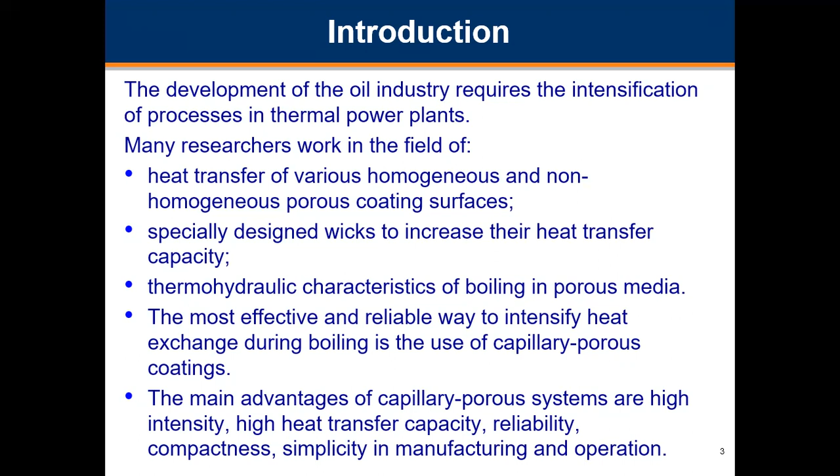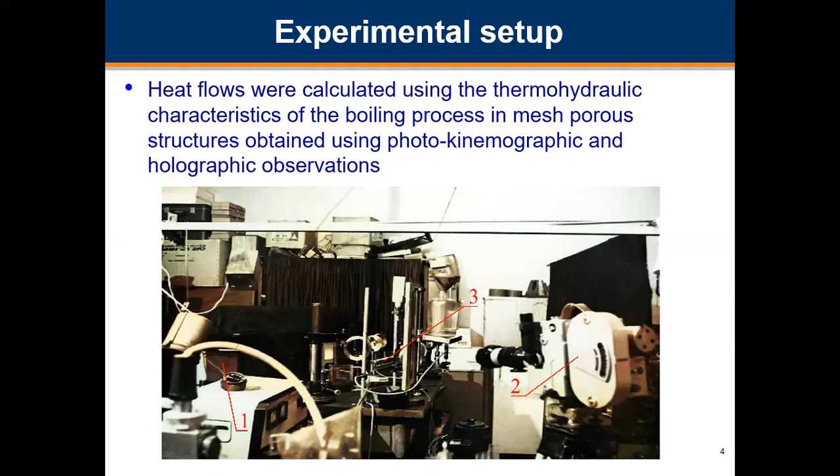Heat flows were calculated using the thermohydraulic characteristics of the boiling process in mesh porous structures obtained using photo-kinemographic and holographic observation. In figure 1, 1 is the laser, 2 is the cine photocamera SKS-1M, and 3 is the porous cooling element. In figure 2, the operation scheme of the porous cooling system, the technique of the measurement of heating surface temperature and liquid consumption and steam are shown.

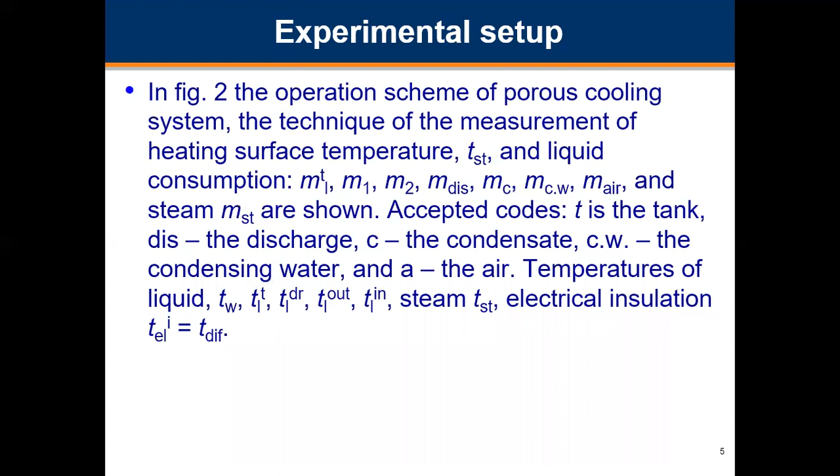Accepted codes: T is the tank, D the discharge, C the condensate, CW the condensing water, and A the air. The supply of electrical energy to the main heater is carried out by a TSD-type welding transformer, the output voltage of which has the following fixed values: 2.5, 5, 7.5 and 10 volts.

The electric current powering the heater is measured according to the scheme with a UCT 6M2 type 0.2 universal transformer. The secondary current is up to 5 amperes. The primary current is 100 to 2000 amperes. The heater voltage drop is measured by a D523 class 0.5 voltmeter. Electric energy is supplied to the guarding heater by a VR-type voltage regulator.

The TSD-type current transformer with 71 volts no-load output voltage is used in studies of the start of liquid boiling and critical loads. The current strength is regulated within the limits of 200 to 1200 amperes. The measurements of liquid and environment temperatures are made using TL4 mercury thermometers with 0 to 50 Celsius and 50 to 100 Celsius scale and a division value of 0.1 Celsius.

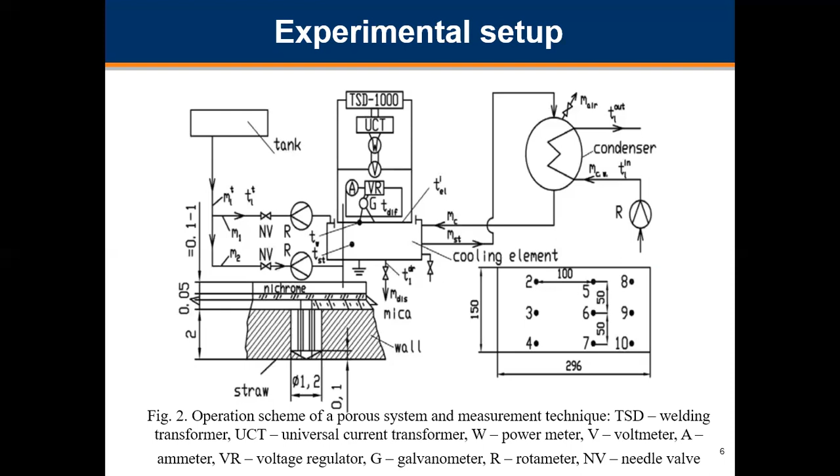The measurements and the technique for processing of experimental data are published in the works. As follows from photocinematic and holographic observations, the dynamics of the vapor phase in cells of capillary porous structure after spontaneous nucleation of a bubble of critical size proceeds with the participation of the evaporating microlayer of liquid under the vapor bubble.

Under certain conditions, the displacement of the liquid film in the center of the bubble starts, followed by the development of a dry spot. Bubble detachment or collapse occurs at diameters several times smaller than at boiling in a large volume, and the value of the detachment radius is calculated by the equation. After bubble detachment, also called destruction, relatively cold portions of liquid are actively sucked up under the action of gravitational and capillary forces.

After some silence of the generation center, a new bubble of critical size spontaneously emerges, with growth time controlled by the coolant flow rate and degree of its underheating, decreasing and occurs with more intense heat supply from the thin, superheated liquid layer surrounding the bubble from the side of the porous structure volume.

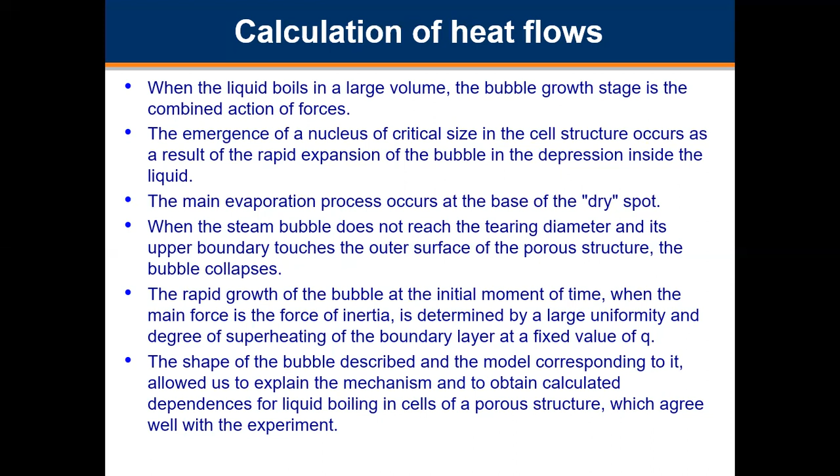During one cycle of bubble development, the temperature of the wall below will change significantly at the stages of microfilm evaporating and cold liquid heating, which explains the high intensity of heat transfer. Reduction of heat flow, value Q, at high parameters of excess fluid would return the system to its previous state.

Surface boiling area, where Ja is the Jakob number. K is the coefficient taking into account the heat storage capacity of the wall. Equation 1 is useful for calculating cooling systems for steam turbines and gas turbines in power plants. B is the area of developed bubble boiling, equation 2. C is the evaporation crisis, equation 3.

The analysis performed of the vapor bubble growth model shows that the presence of vapor on the wall should lead to an increase in the wall temperature under the growing bubble and impair its performance, but the steadily existing microlayer of liquid controlled by the gravitational and capillary forces allows to withdraw several times more heat flow under a single bubble compared to the average integral value, which generally reduces the wall temperature during bubble growth.

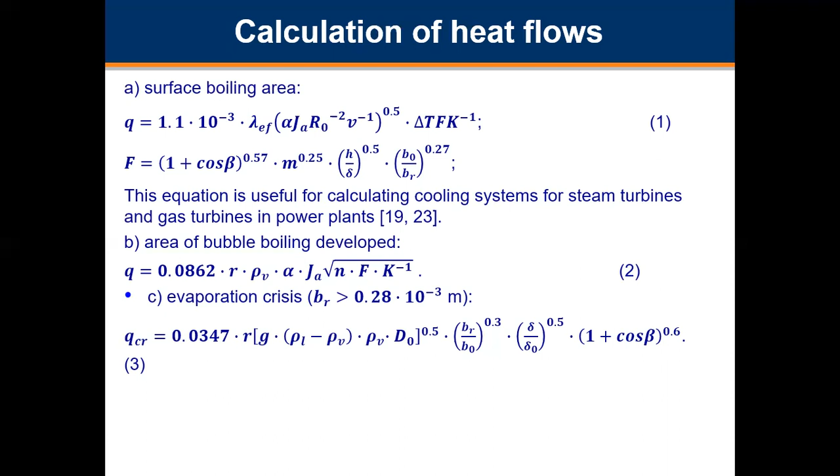Thus, experimental data on thermohydraulic characteristics of the boiling process in mesh porous structures, which can be controlled by the combined action of gravitational and capillary forces, are summarized. Calculated dependencies of the heat flow, equations 1 to 3, on temperature pressure, liquid excess pressure, thermophysical properties of the wall, orientation, geometric characteristics of porous structures, and heat exchange wall are obtained. These equations allow for calculations in the design of thermal power plants.

To analyze the data and determine the limits of application of the porous cooling systems considered, taking into account the different designs of capillary porous materials, two types of evaluation criteria have been adopted: the dimensionless number St, and the dimensionless temperature, equal to the ratio of the temperature in the nozzle trough to the temperature at the saturation line at a given pressure of the working fluid.

In order to conduct a comparative analysis for the combined porous system, we introduced the dimensionless criterion, the ratio of cell width of porous materials, the ratio of the cell width of the near-wall layer to the cell width of the subsequent layer. Area of low values of the dimensionless temperature.

At liquid side wall temperatures less than the coolant temperature at the saturation line, the coolant phase transition from liquid to gaseous state with heat absorption does not occur. Decreasing the temperature to these values is unacceptable, and when the dimensionless temperature reaches the value of 1, with prerequisites for a subsequent decrease in the wall temperature, a boiling crisis occurs.

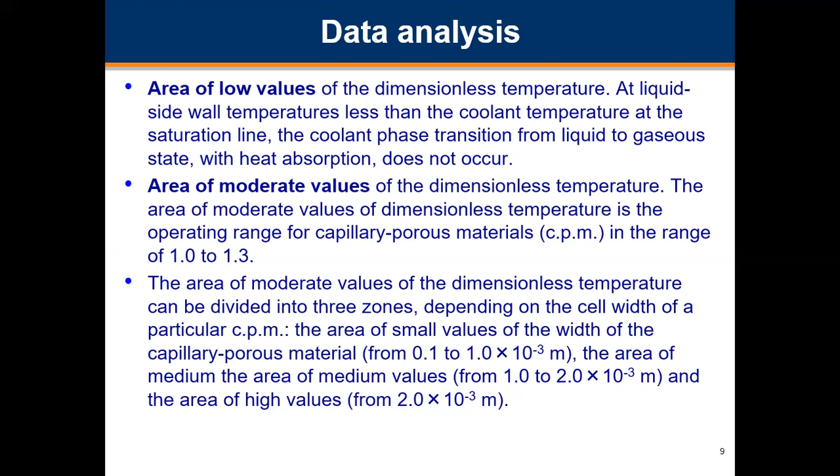The area of moderate values of the dimensionless temperature can be divided into 3 zones, depending on the cell width of a particular capillary porous material: the area of small values of the width, the area of medium values, and the area of high values. The increase in the wall temperature, an increase not calculated due to system imbalance, of 1% leads to a deterioration of the heat transfer process and reduces the heat transfer coefficient by 1%.

For a traditional flow-through cooling system, the allowable temperature fluctuations are no more than 10 K, with all heat flow accumulated by the wall, which leads to temperature overstress in the material of the apparatus. Any increase in temperature requires an increase in coolant flow and, as a consequence, a reliable automation system.

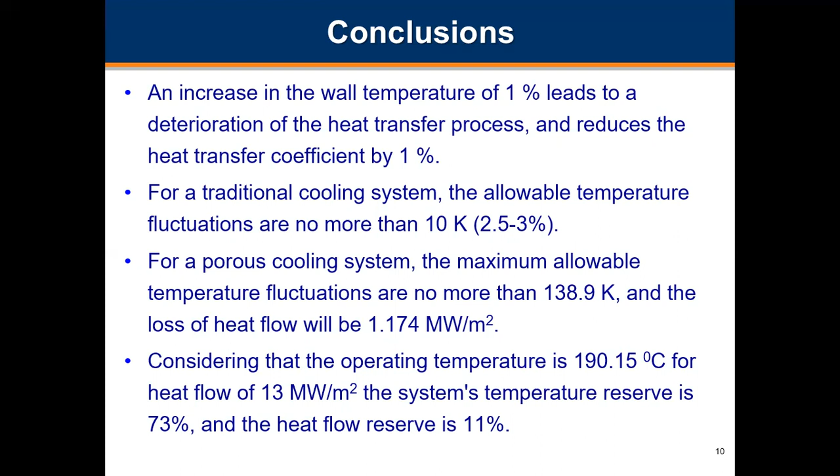For a porous cooling system, the maximum allowable temperature fluctuations, which the cooling system compensates for independently and with a high degree of response to changes in the specific flow rate, are no more than 138.9 K, and the loss of heat flow will be 1.174 megawatt per square meter. Thank you for your attention.